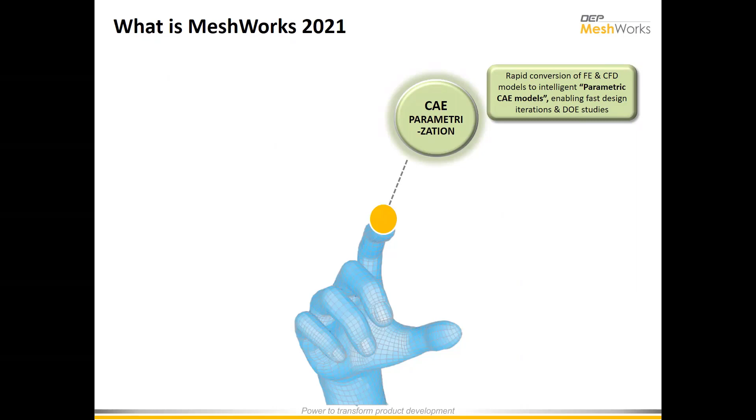Now let's talk about MeshWorks. MeshWorks 2021 is our latest release. It's a CAE parameterization tool which helps you convert FE models or CFD designs into a parametric model so that you can perform quick iterations and design of experiment studies.

Next is our morphing technology. With the help of MeshWorks morphing technologies, you can get upfront design solutions without any CAD. It also reduces the CAD to CAE and CAE to CAD kind of interaction time by directly taking the legacy models and utilizing that for your new design.

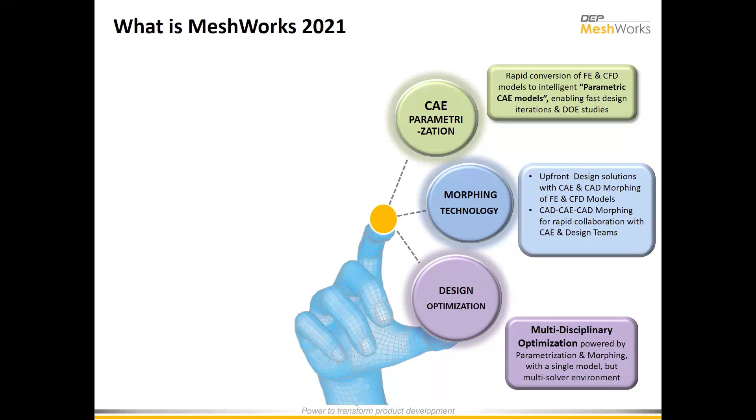Next is design optimization capability. MeshWorks has a powerful DOE facilitation, and it can help you generate MDO studies and perform quick optimizations. It internally has a parameterization and morphing environment, so if you create parameters on one model, the same can be appended into other models. For example, if you are parameterizing an NVH model, the same can be carried forward or transformed into a durability, crash, and CFD model. So you only have to do one-time morphing, and that can be carried forward to other disciplines.

Next is a process automation capability. Most of our customers are utilizing our process automation capability, wherein DEP will customize and give the tools based on the requirements of the customer's place. It is easily saving like 70 to 80% of our customers' time on their day-to-day operations, thanks to our MeshWorks to help us achieve this.

Next is pre and post-processing capabilities. As we all know, MeshWorks has a pre and post-processing capability. It has a robust meshing module and a very good post-processing capability, with a lot of automated tools, which also includes result exploration.

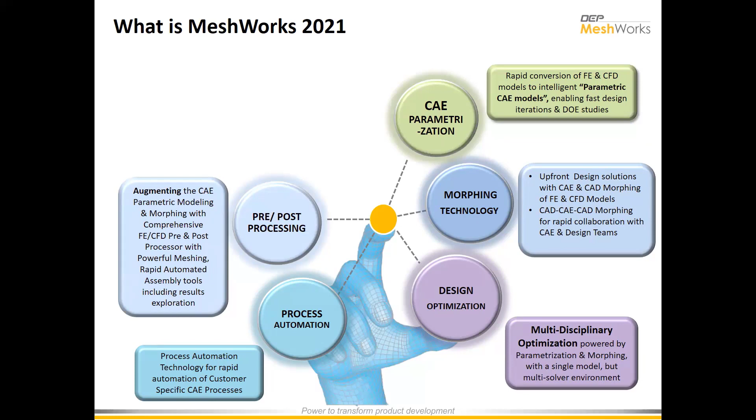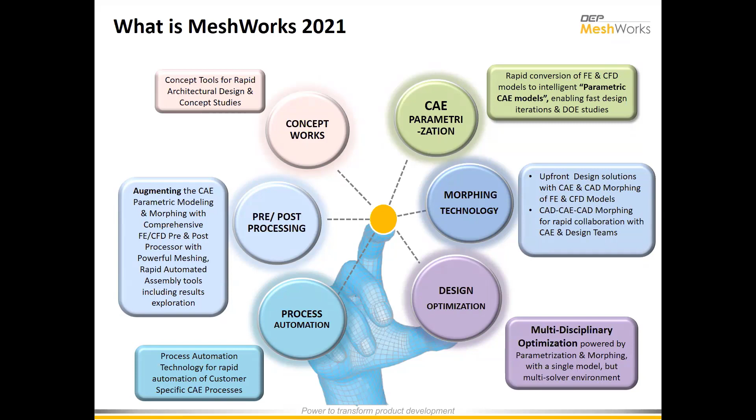Finally, we have released a new capability called ConceptWorks within MeshWorks. This is a tool which helps you design new concepts. For example, if you're looking at new architectural studies or new concept studies, you don't have to start from scratch. You can directly use our software to generate new concepts, and you can quickly reduce the conceptual development time frame in your product development cycle.

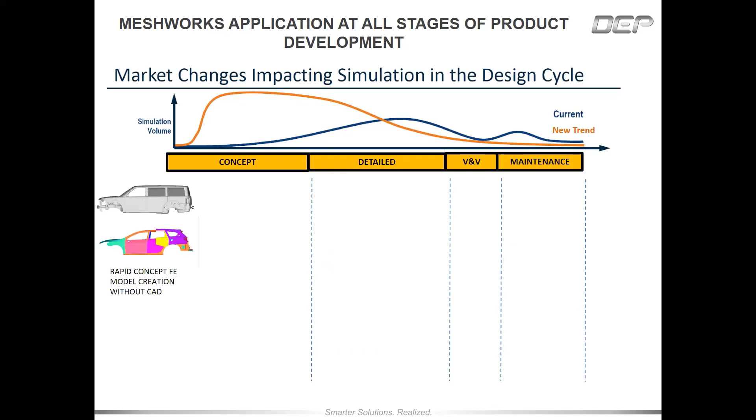Coming into the MeshWorks application at different stages, here is a graph which shows the current trend and the new trend with the application of MeshWorks. MeshWorks morphing and concept modules, when applied in the conceptual stage, let you quickly achieve an initial concept without spending much time starting from scratch. So at the end of the conceptual stage, you will pretty much have 75-80% of a frozen design. And when you go further into the detailed evaluation phase, MeshWorks parametric CAE and topology optimization modules will help you tune up the performance.

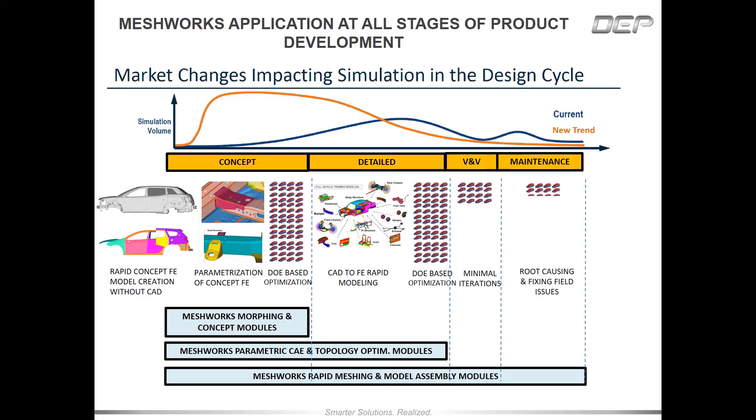Finally, when you go for the virtual validation phase, you will only have minimal iterations that need to be performed. So in the final stage of going to the prototype, the entire process will only consume about 60% of the actual time, compared to the conventional process. Now, coming into the challenges.

Being a tire engineer, what are our regular challenges? For example, if I need to do hex meshing on tire models, with the current tools in the market I have a lot of restrictions, or I need to undergo a lot of training, and I need more experienced guys for building hex models. Is that the real challenge?

Or if you're looking for a simplified process to quickly analyze the tire tread patterns, do you really need a full CAD to start your analysis?

The next question is, if you want to make a design change from one design to another, are you really waiting for a CAD engineer to make the changes and give it back to you? Are you really struggling to make some quick, fine-tuned local design changes on the tread patterns? Is it taking more time?

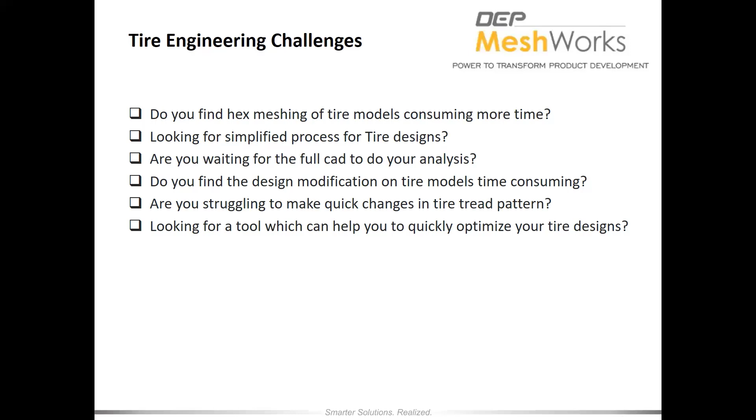Or are you looking for a tool which can help you optimize the pattern and use a lot of DOE kind of studies? For all these challenges, our answer is a solution through MeshWorks.

So in today's session we are going to talk about some of these solutions. First is mesh model creation, with a live demonstration on how you can create a very high quality 2D and 3D mesh model for tire designs. Next is morphing and parameterization on tires - you can see how easy it is to create with the help of MeshWorks. We'll show that live today.

And with all these changes, how you can nicely plan the design for aquaplaning and do any kind of further optimization study would also get covered.

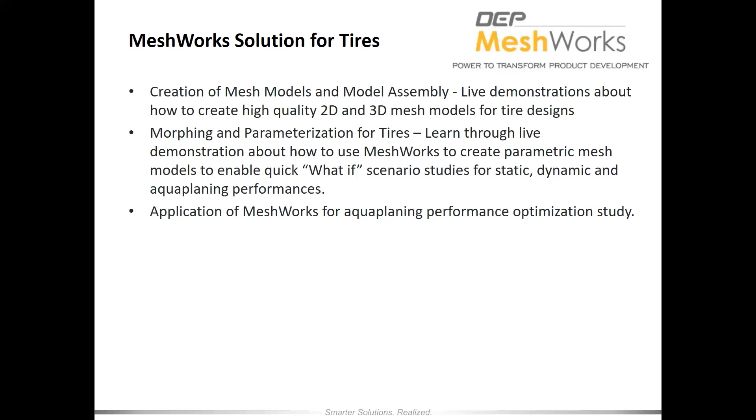Now coming into the tire designs - with the help of MeshWorks, you can create any type of models. You can create the shell mesh, which automatically becomes parametric when you use MeshWorks. You also have sophisticated tools which can automatically generate hex mesh on your complex tread patterns.

If you're looking for discrete tire modeling to perform your NVH assessments, yes, we do have a nice process in MeshWorks.

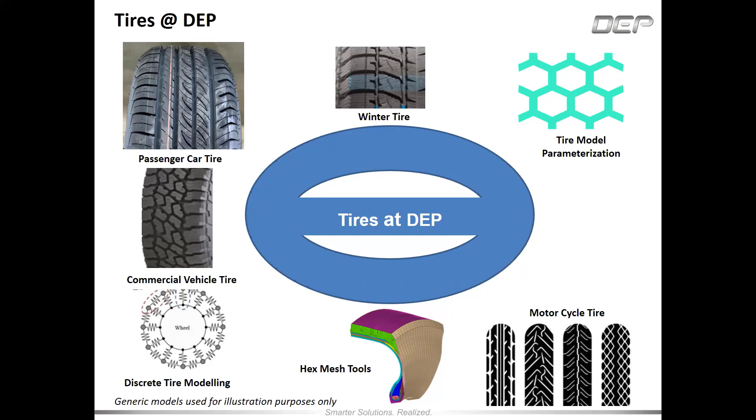Saying all these things, when you come into the MeshWorks application, if you are planning to study air inflation pressure, response to certain vertical loads, or fitment analysis with a rim, those models can be easily generated with the help of MeshWorks on a planar level.

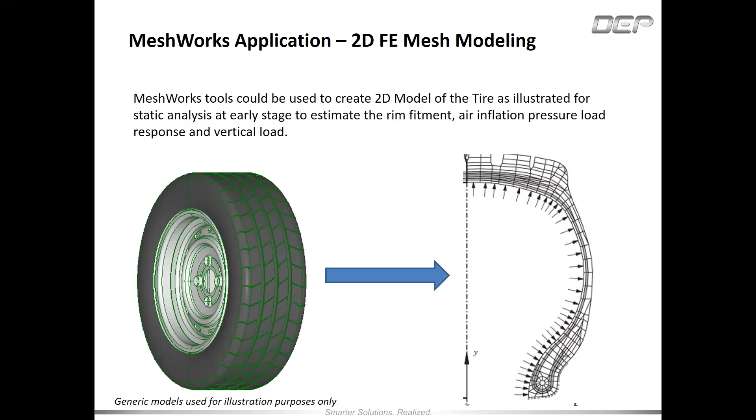Next is our tire modeling process. When you have a CAD section to start with, MeshWorks is a nice process - we only need to pick the CAD face. Then the software will automatically generate the cross section, with an internal process identifying all the cutouts that need to be imprinted. It will have them all captured in a plane in the CAD, and generate a nice cross-sectional mesh.

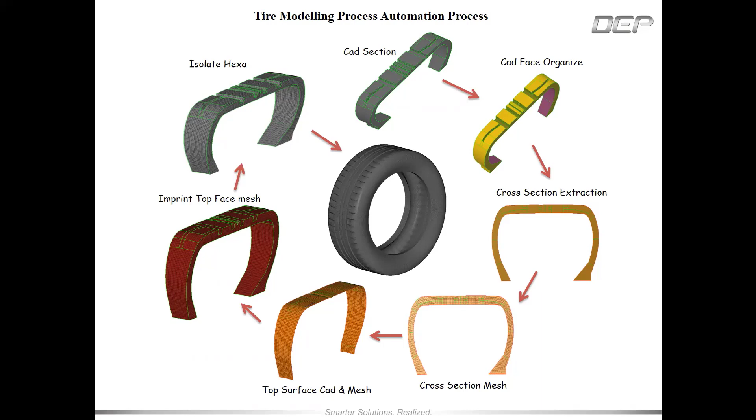And then you just need to do a top surface mesh and do an imprinting. Finally, you will get a nice hex mesh model exactly matching the original design.

And here is one example - if you have a tire pattern available, you can nicely generate that into a hex mesh using our automated hex modeling tool, which Paresh will take you through in today's session.

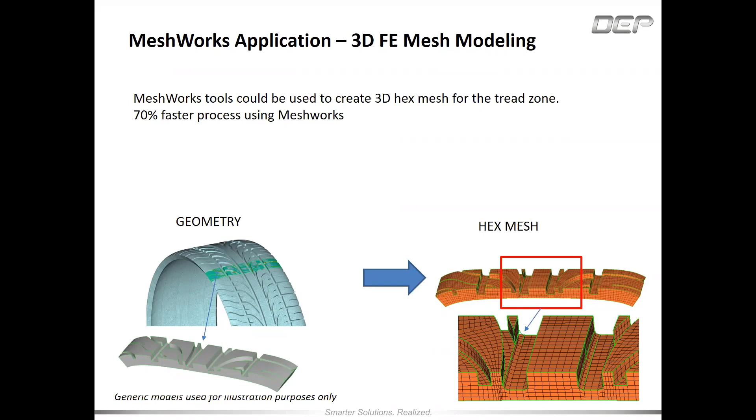On top of this, for applications like NVH, where NVH tire modeling is going to be very challenging, we do have a nice solution through MeshWorks. If you have any interest in that, please do ping us - we can take you through those processes, which internally have some tune-up parameters for optimization.

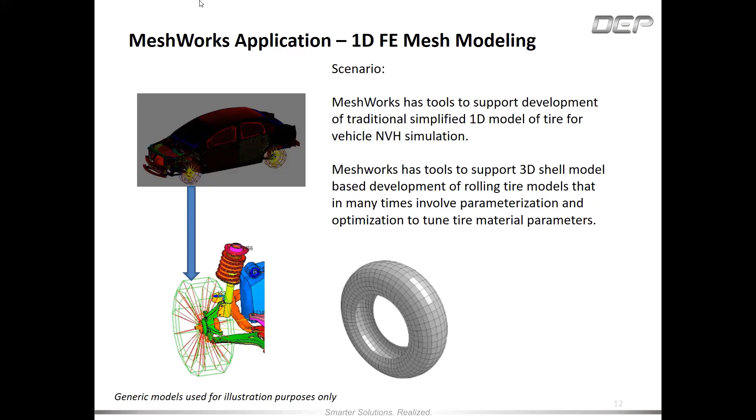Thank you. Sure, Raj, can you hear me okay? Yes Paresh, yeah, okay. Once again, thank you so much, Raj. So let's go ahead with the demo.

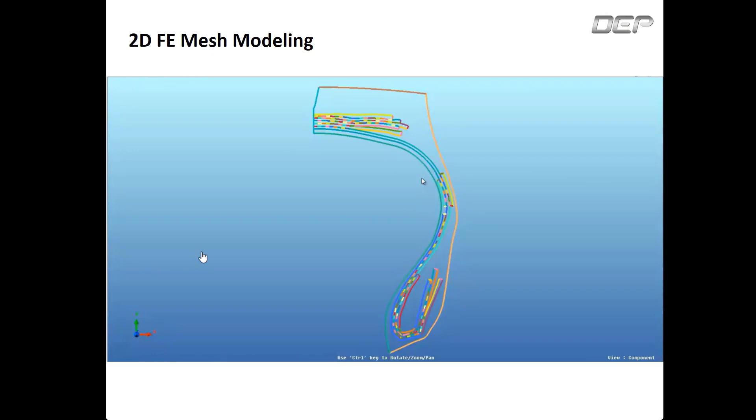So the first demo would be on 2D FE mesh modeling. Here in front of us, we have a 2D model of a tire for stiffness analysis. We have this CAD data which we received from the CAD engineer. The inner portion you see here on the screen is for the pressure load area, and the outer is for the carcass.

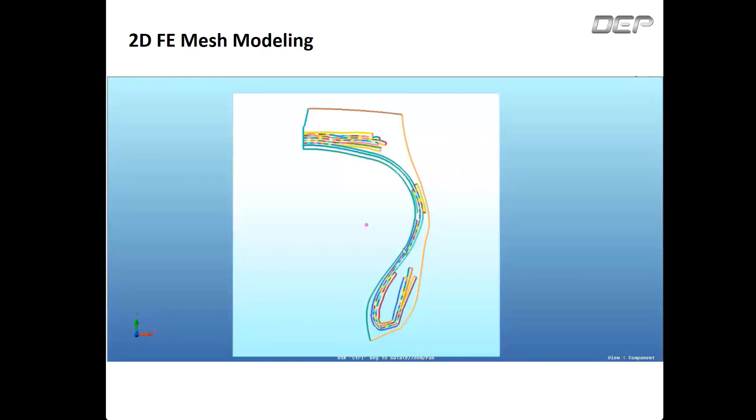Now, the first thing we need to do before starting the 2D modeling is create a nice CAD surface onto these particular CAD curves. In MeshWorks, it's pretty easy - a user has to define the plane, define the size of it, and simply click on create. Automatically, a plane will be created, and a CAD curve or CAD surface will be created.

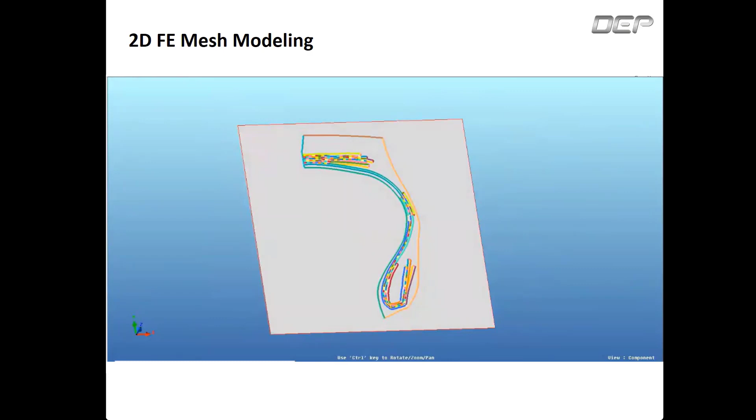Now, the second step is we will be imprinting the CAD curves onto the CAD surface. To do that, it's pretty easy - again in MeshWorks, by just selecting the surface and the lines, and simply clicking on trim. So this is our first step, where all the CAD features have been imprinted onto the CAD surface. By deleting the extra surface, we just have the CAD surface which we want to mesh.

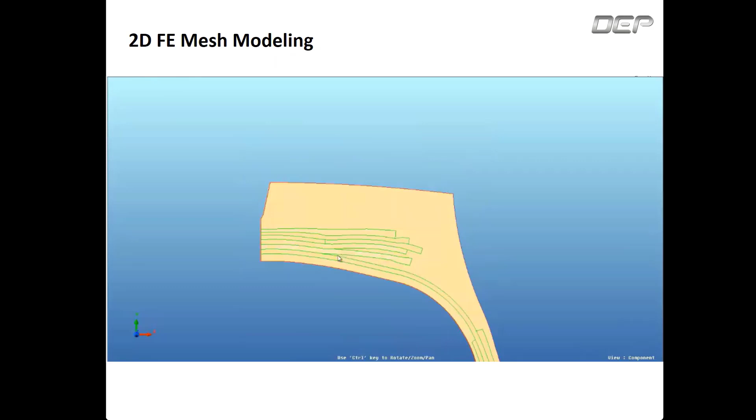Before going for a mesh, as we can see, all the CAD surfaces are organized into a single collector. But in reality, all the different lines we see in between are nothing but the reinforcements, and these reinforcements have different materials and different properties. So before meshing, we will organize all the reinforcement CAD sections into different collectors, so it would be easy afterwards to define the material and property for each of these different sections.

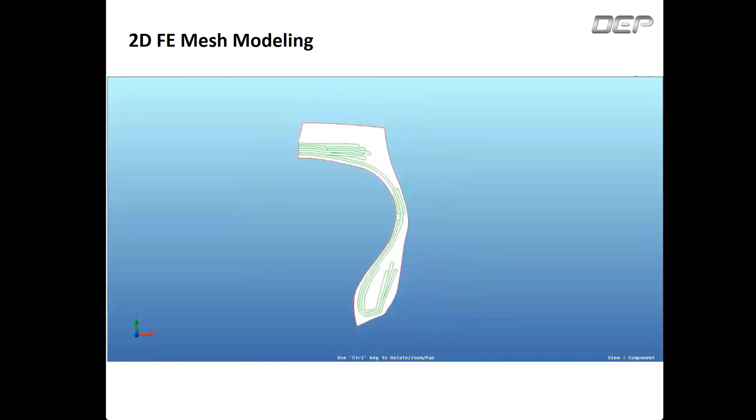Now, once the organization has been done, we can directly go into meshing. With the meshing type as mixed, target element size as 2.5, a user can simply go ahead and select the CAD surface and say preview. Here, this is our mesh output. By using these seeding points, we can go ahead and change the seeding points of this mesh so as to get a good and nice mesh output.

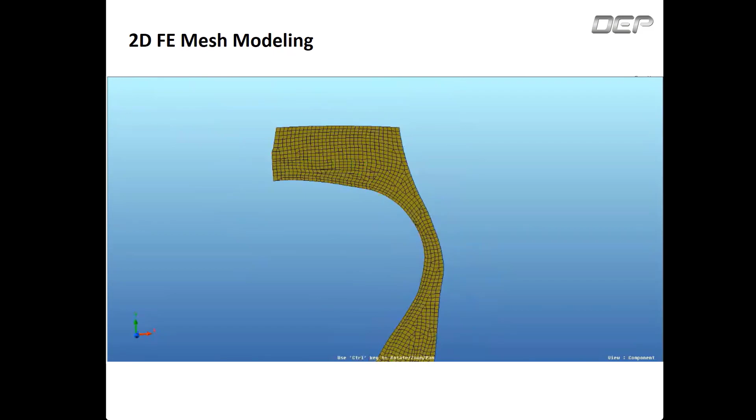You can also go ahead and do a quality correction on this particular mesh to get a good mesh flow. But we have a unique option called move tria in mesh editing, where automatically MeshWorks, when a user clicks on the tria element, will define a white path, and a user can nicely click anywhere on this particular white path where the tria can move. With this tool, I will select the tria and simply click on the edge, so automatically all the trias are removed, and we get a very nice and smooth mesh flow.

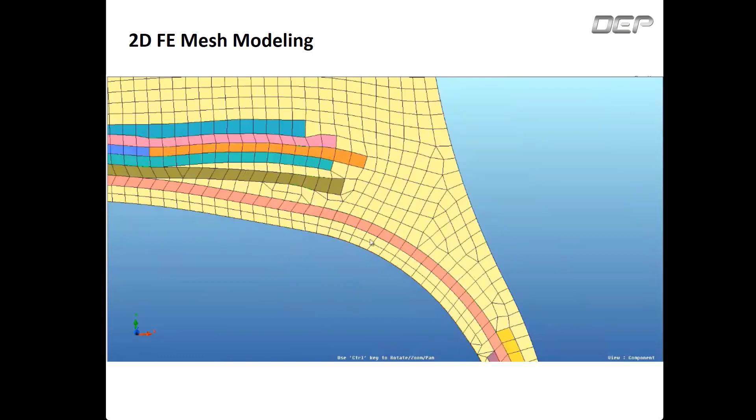Similarly, if we have opposite trias, what we have to do is just align the opposite trias to each other and simply click one tria onto the other. So we can remove the opposite trias quickly. Likewise, we can go ahead and get a very nice and smooth mesh flow within less time, which will help us in reducing the model building time.

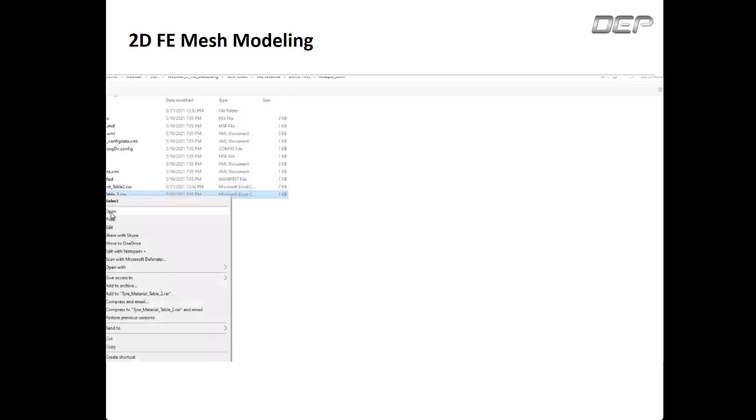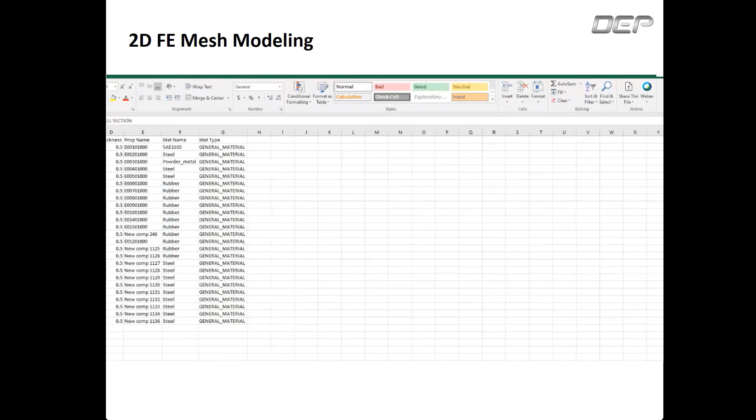We can even see the material has been written in front of each and every component's name, along with the material type. Now we will open the material table, where we can see all these materials are defined with E, density, nu, etc. So this is just a small prerequisite which we need - we just have to fill this data.

And once we have these two CSV files available, we can go ahead and do an automation for assigning material and properties. We can see there are no material and property, and these are the same component names which we saw in the Excel sheet. Now we will just be selecting the component CSV file, material CSV file, and click on create and assign.

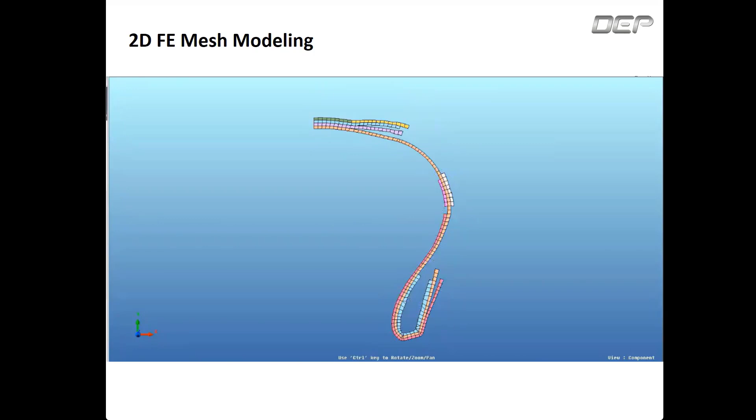Automatically, within a few clicks, in a few seconds, the material has been assigned, and we can see the same names that were in the Excel sheet. Now if I go ahead and click on steel and say show me the steel property, the steel material, then these are nothing but the steel material. Similarly, we have some properties.

Now in your Excel sheet, there might be n number of properties which might be created. So it will take all the data and keep it as unused or empty. You can just go ahead and remove the unused and empty, and then this is what has been assigned to the respective material and component.

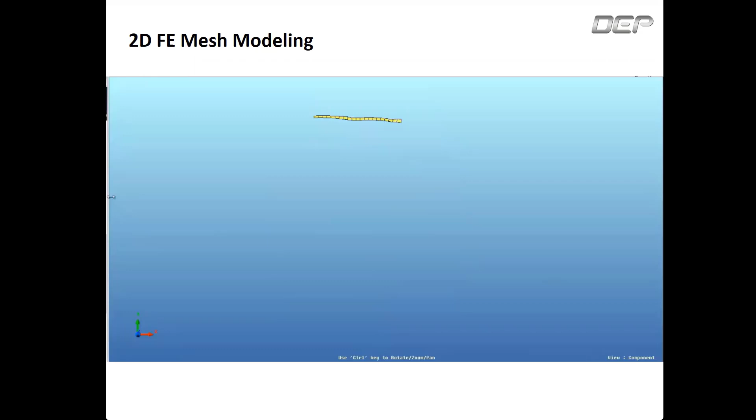That is what we can see on the screen now. So, likewise, this is how quickly we can do 2D mesh modeling in MeshWorks. And once the meshing has been done, we can nicely go ahead and assign material and property.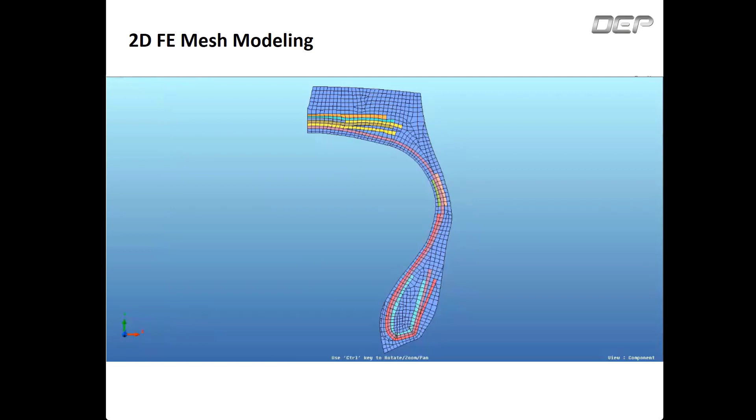Now we can go ahead and create a runnable model in MeshWorks, and we can also go one step further by creating a parametric file, which means that if you have to do any modifications in your 2D FE mesh, you can create some morphing parameters onto your component.

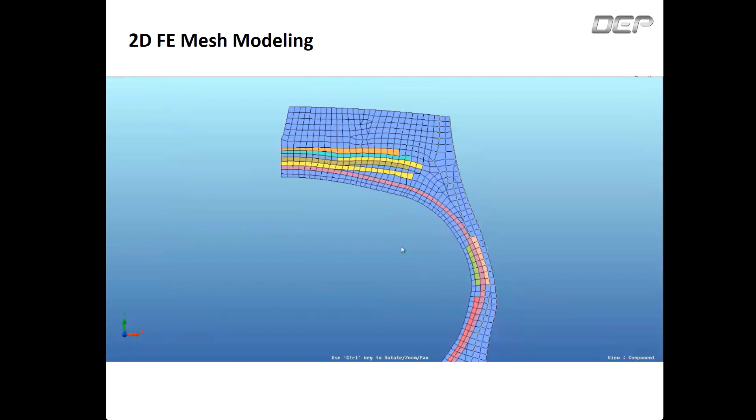Now you can see here, if you want to adjust the pressure load, you just go ahead and select the interface and simply morph your mesh, morph your 2D mesh. If you have to increase or decrease the material of the tire, go ahead and increase the outer width. That's what we are looking at in front of us.

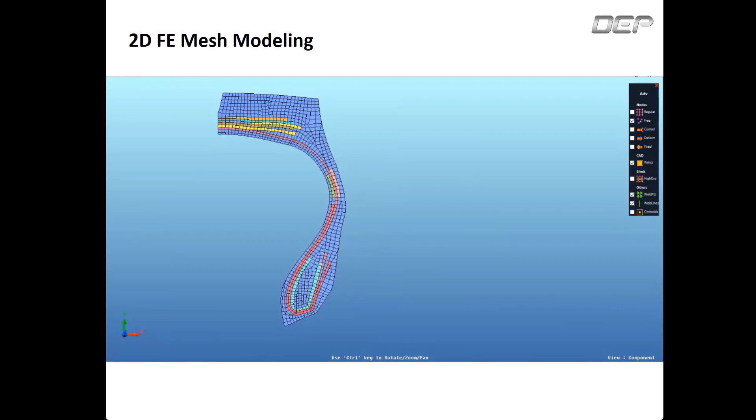Now, rest of the parameters are for the reinforcements. What if you have to increase or decrease the material for the reinforcement? Yes, you can do that too by just going ahead and creating some parameters. We just have to make sure that whenever we create these parameters, the profile of the tire is not changing. So that's what we have taken care of. Only the inner elements are moving, but the outer profile is exactly the same.

Similarly here, we can go ahead and see different outputs. We can increase the material of the rubber or steel, and likewise we can go ahead and do our optimization study. So this was all about the parameterization of a 2D mesh modeling.

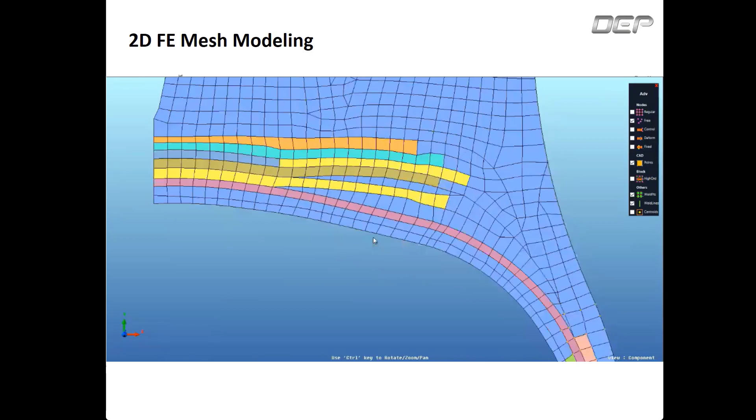Now let's go ahead for a 3D mesh. So what if we have to do a hexa mesh? Here in front of us, we have a cut section of a 3D model, which we got from the CAD engineer, and we just have taken a cut section of it. Now, below we have the tire automation. We have created a special automation for this particular tire tread. So first, let's see how our model looks like.

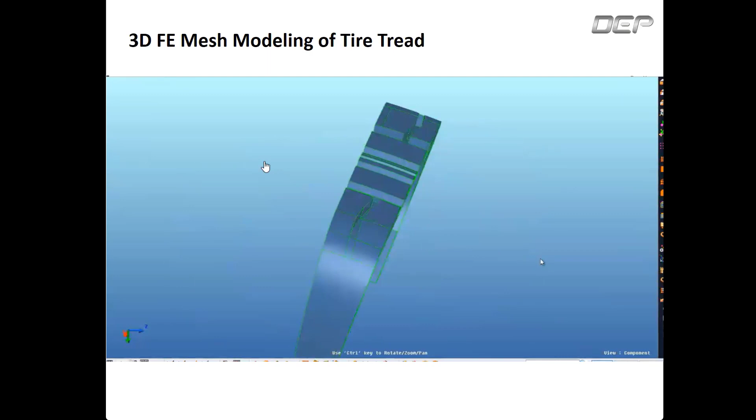So we have many grooves, as we can see here, and there are a lot of features too in our model. So the first step we will be doing here is organizing our CAD into different collectors. This will help our next steps to perform well.

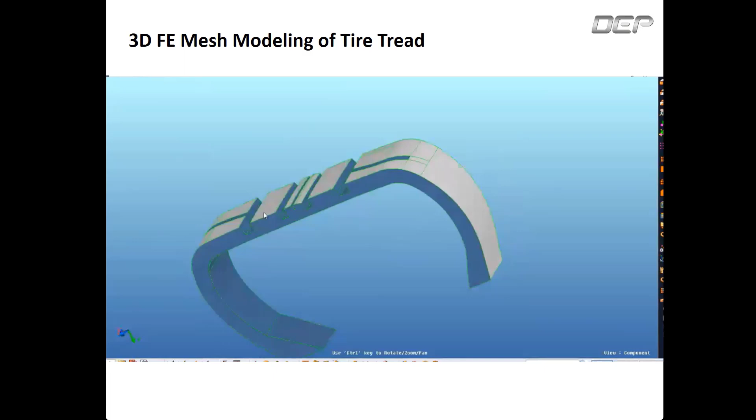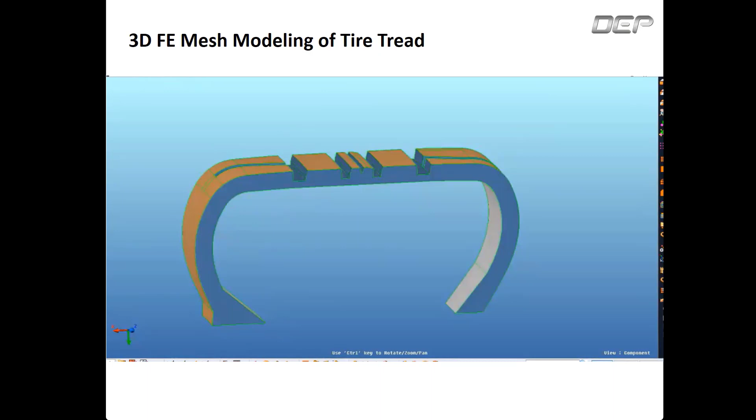So basically, to create a hexa mesh for this particular tire tread, we will be following two steps. One, we will be imprinting all the features, or capturing all the feature lines in one direction, that is on the side panel. We will mesh the side panel and create a mesh where the features have been nicely captured. Then the second step is we will capture all the features of the top surface, mesh the top surface, and imprint the top surface onto the mesh. So that will complete our entire process.

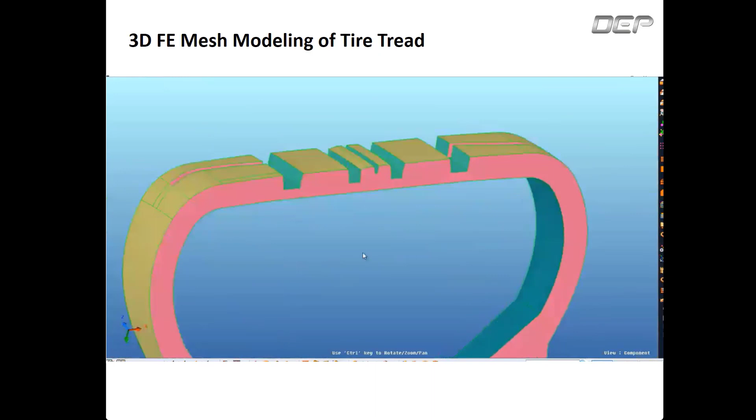So let's go ahead and see our first step. Now, once the organization has been done, we will go ahead to imprint or capture all the feature lines in the side panel or side surface.

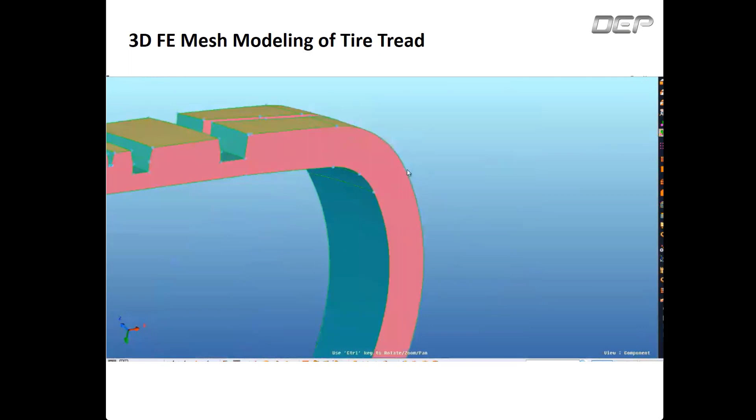So a user has to define the axis, define the center point, then select the width of the tire tread, then the extreme endpoints. These are a few prerequisites which we need to select before imprinting all the features. Then automatically all the features will be imprinted, along with the surface to imprint. Automatically MeshWorks will create a new CAD surface with all the imprinted features.

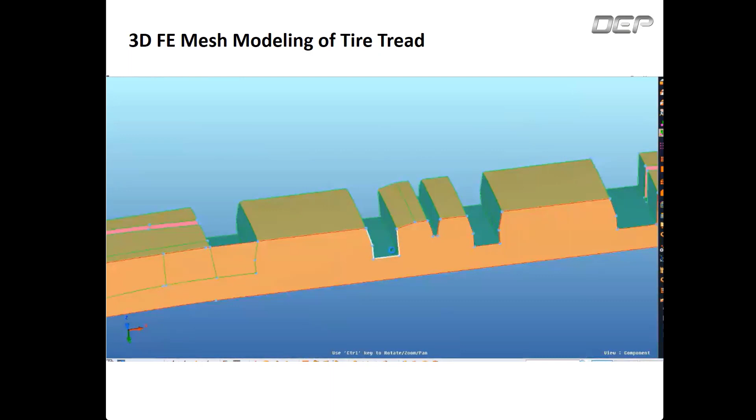So the first step is to create the CAD surface. Now we can also see there are some grooves which we need to fill out. So we have created a second tool called fill grooves, where the user just has to select the CAD curves of the particular groove. That's all. So by just selecting the CAD curves, we can go ahead and fill the grooves automatically. We will be doing it for the entire model, wherever we see the grooves, we will just fill them out.

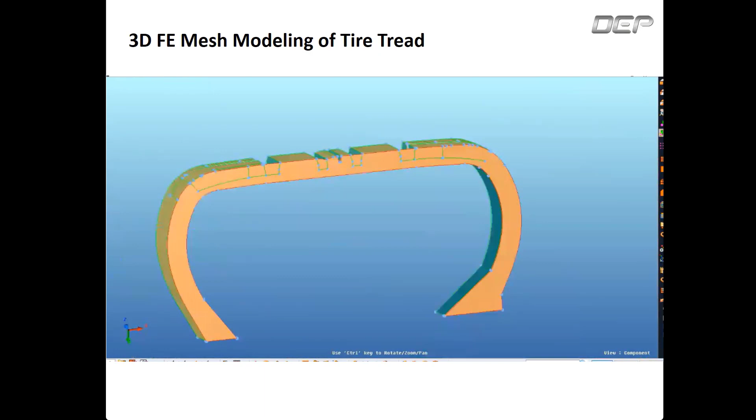Now, once the features have been imprinted, we will go for meshing. As we are doing hexa meshing for this particular component, we need a quad dominant mesh type. Then the target element size would be 2, minimum is 1, maximum is 4. As per the customer or user, he can change the element size and then proceed ahead.

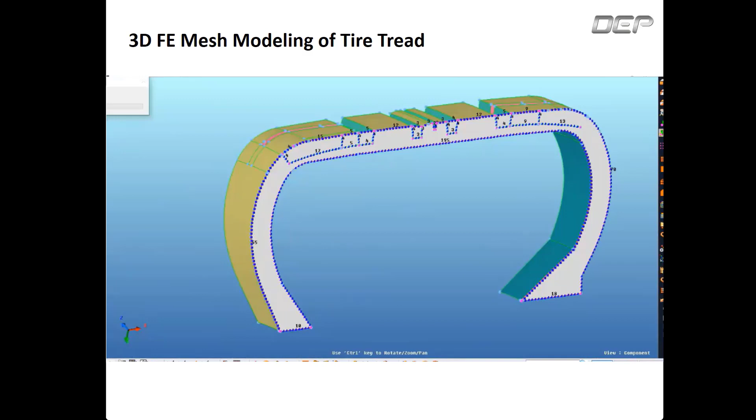Now, once I click on preview, MeshWorks will show the mesh. This is nothing but a preview first. We will be taking help of these seed points to get a nice quad dominant hexa mesh.

Now, as we can see, there are some seeding points on the right side and left side which are not matching. So what we will do is use the discretized CAD surface. By just clicking on 2 points onto the CAD surface, it will nicely go ahead and trim the CAD surface. This will help us create a good mesh flow for this particular side face.

Similarly, we'll go ahead and select different sections, and trim the CAD surface. Once the CAD surface has been trimmed, we will go ahead and, with respect to the seeding technique, create a nice quad dominant mesh. So this is the first section. Likewise, we will go for the second section too, and then the entire model.

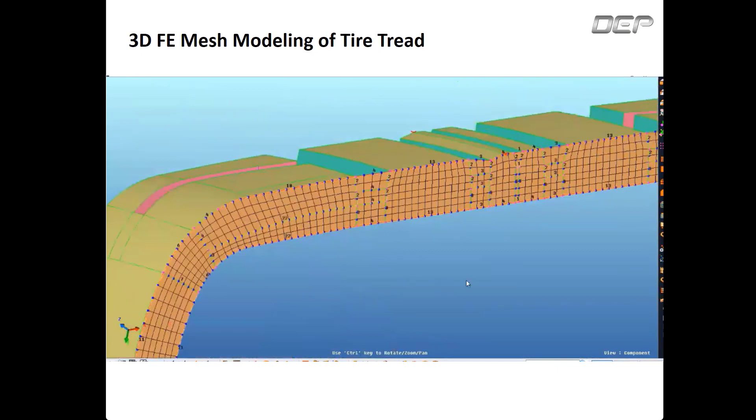So this is the final output, which you can see, which has covered the grooves too. Now the side mesh has been completed.

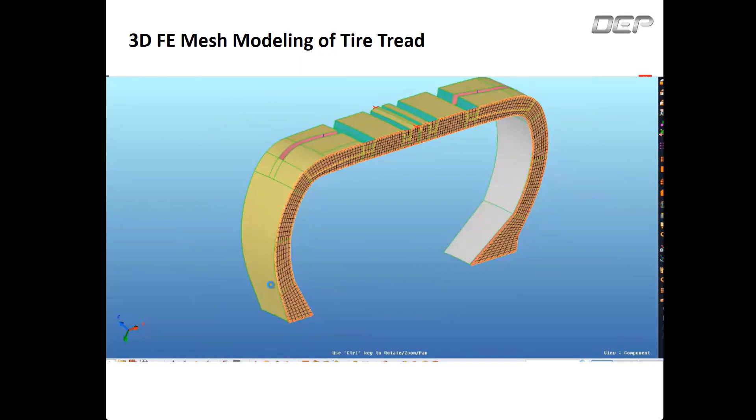Now the next step is just to go ahead and create a hexa mesh in the side view. So for that, we just have to define the tire geometry. Automatically, when the hexa mesh has been generated, it will nicely adjust the hexa mesh with respect to the tire geometry. Select the geometry, top surface, bottom surface, and it will create a top surface mesh, and also create a hexa mesh in the background.

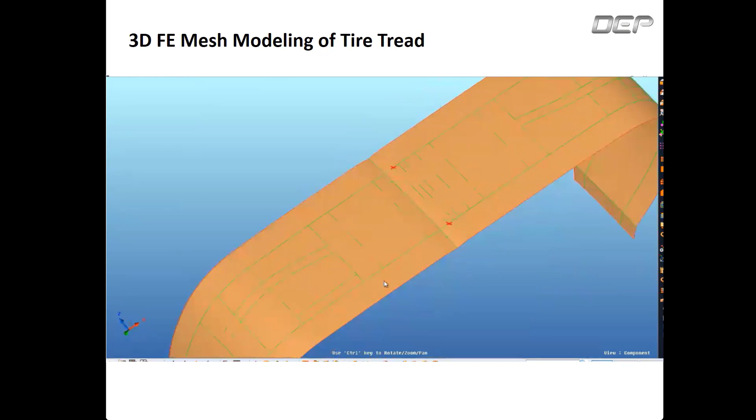So there are 2 steps going on here, as we can see. By selecting the top surface and bottom surface, it has created an additional CAD surface which has all the feature lines. I will delete the feature lines and CAD surface which are not necessary. And then it also created a hexa mesh.

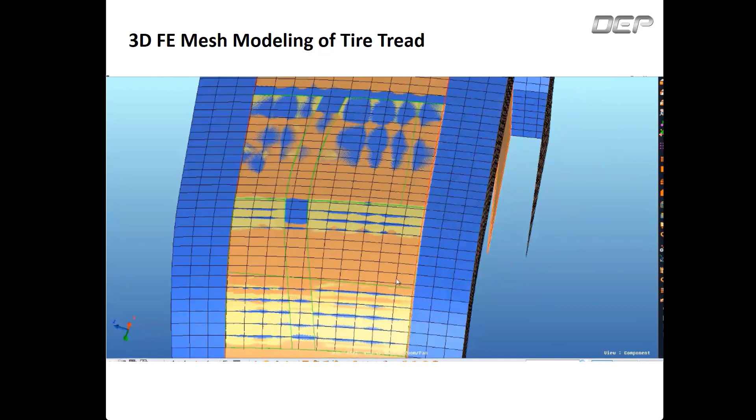Now, if we see here, the hexa mesh has not been aligned with the particular CAD surface which we just created. So this is our second step, where we will create the same mesh onto the top surface and then imprint the top surface onto the hexa mesh which is below, as we can see here.

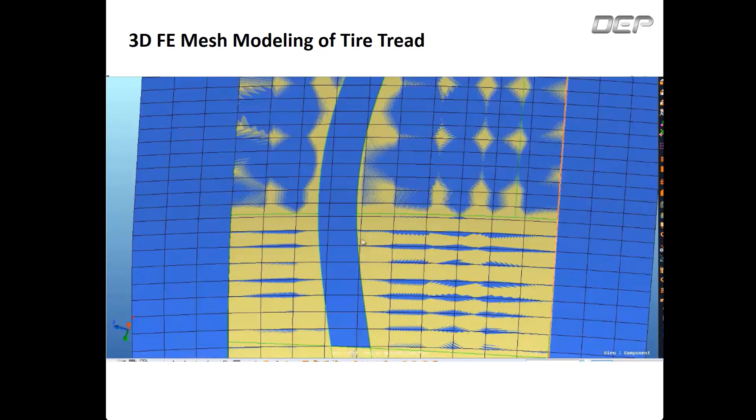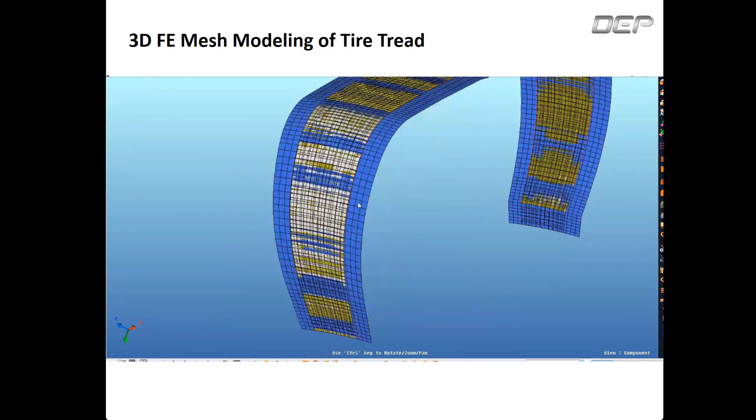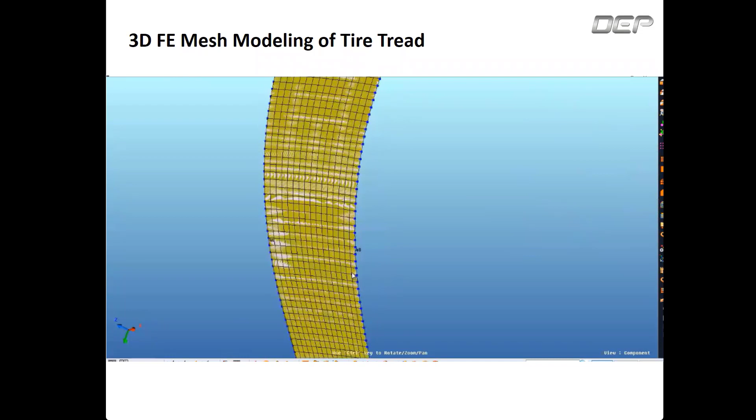So we will follow the same process. Select the top surface, then click on preview. With respect to discretize and show seed points, we will get a nice mesh. Now we'll just adjust the seeding points and then click on map mesh. Then we'll get a good quad dominant hexa mesh.

And this is the final output, where the entire mesh is quad dominant and all the features have been nicely captured.

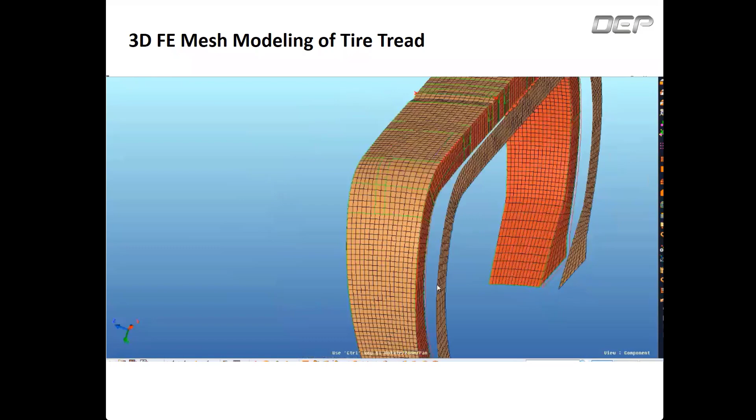Now the last step is to imprint that particular top surface feature line quad dominant mesh onto the hexa mesh. So just by one click, our final output is almost ready. This is the final output, where from the side view we have nicely captured all the features, and from the top view we have also captured all the features.

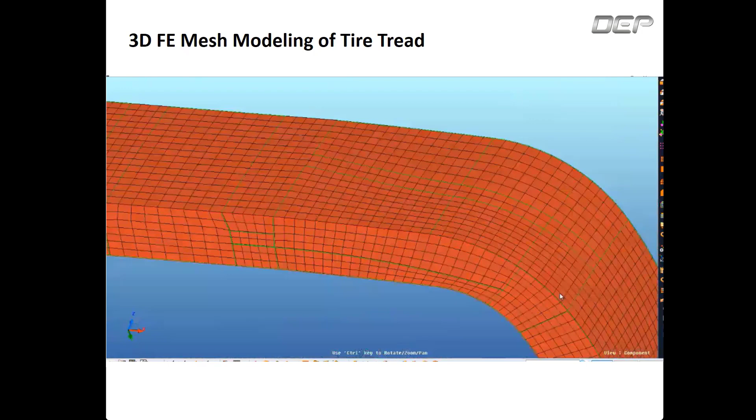Now here we also saw that there are some grooves in this particular component which are unnecessary, so you don't have to go ahead and do it manually. We have an option called isolate hexas. Automatically it will detect the grooves and organize them into a different collector.

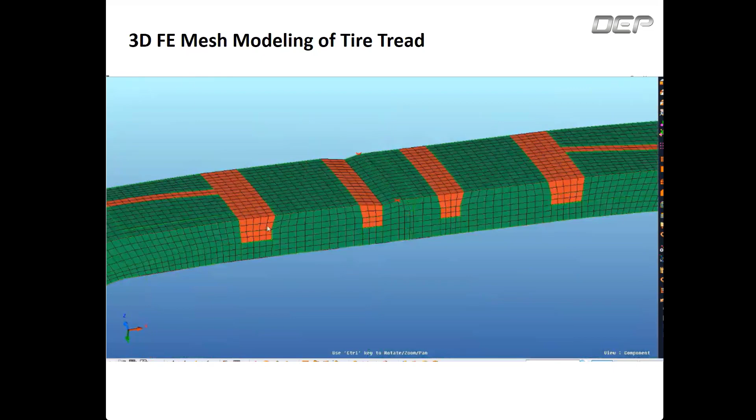So this is nothing but our final output for the 3D modeling of a tire tread.

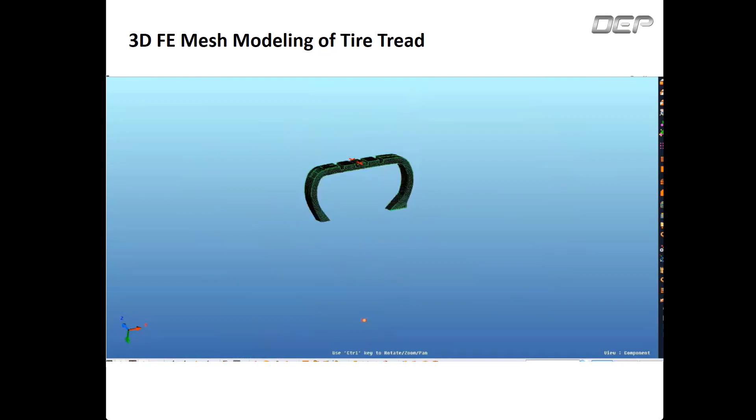Now once we get a cut section of it, we can go ahead and revolve it by 360. To do the revolve, we have two types: one is variable pitch and the second is single pitch. The example in front of us is a single pitch. We also support variable pitch, which needs some additional CSV files and additional data. For this process automation, the user has to select the component, center node, and the axis. Automatically, MeshWorks identifies the angle, and then it will create a revolved 360 nice hexa mesh for us.

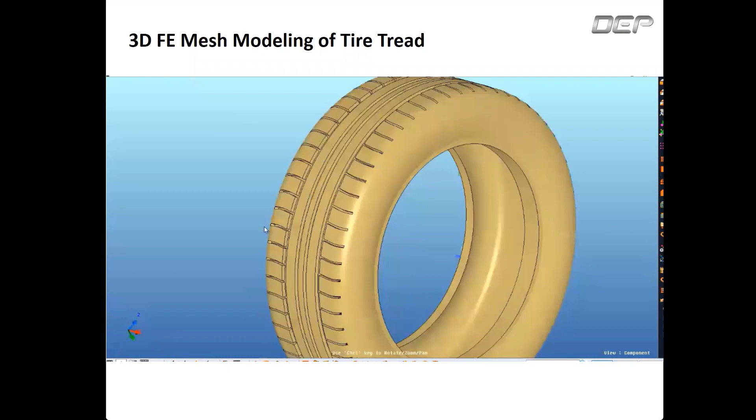So this was the entire process of modeling. Now, what if you have to go one step further and create some parametric file for that particular cut section? We can go ahead and see that too. So let's say, beforehand, we have created some parameters.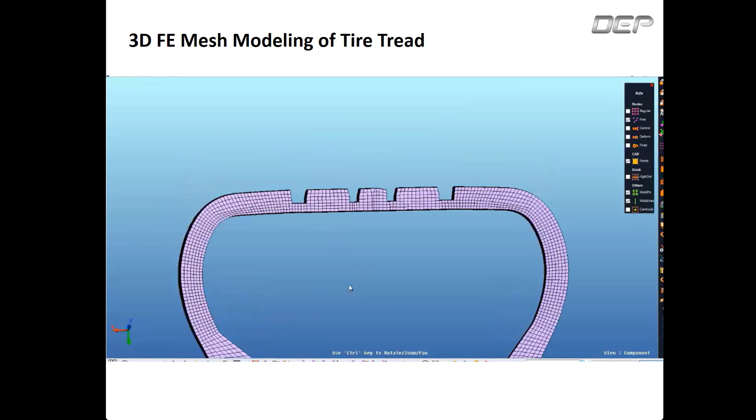The first one is a tire thickness change. Let's say you have to change the thickness of your tire. What you can do is create some morphing with the help of the morphing technique in MeshWorks, and create these parameters. All these changes are now happening on the hexa mesh. So this is for the tire thickness change.

Similarly, we will go for a tire profile change. What if you have to change the profile of the tire? At the end, it will very nicely go ahead and create the entire 360 revolved hexa mesh, so you can go from one tire size to a different tire size just for an optimization study.

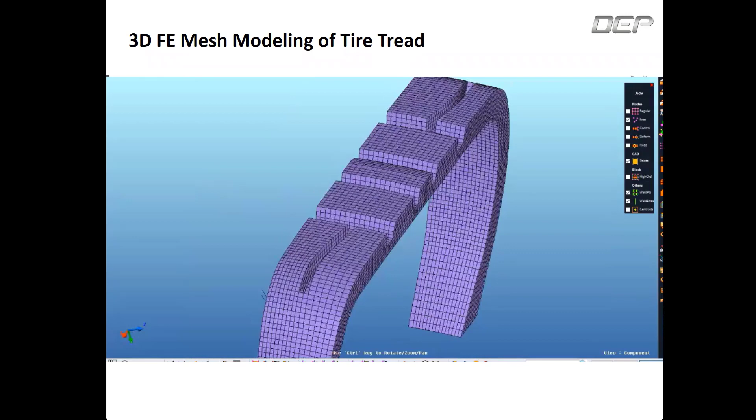Then we have the tire width change. What if you have to change the width of the tire? You can do that too. You can play around with the grooves. If you have to change the thickness of the groove, you can create some parameters for that.

I'll just zoom in to this location to show exactly how we can modify or morph the grooves. Here we see only the thickness has been changing. The next parameter would be for the groove height. This is our last parameter.

So here we are not changing the profile, we are not changing the thickness or the width of the tire. We are just increasing or reducing the material of the groove for your optimization study.

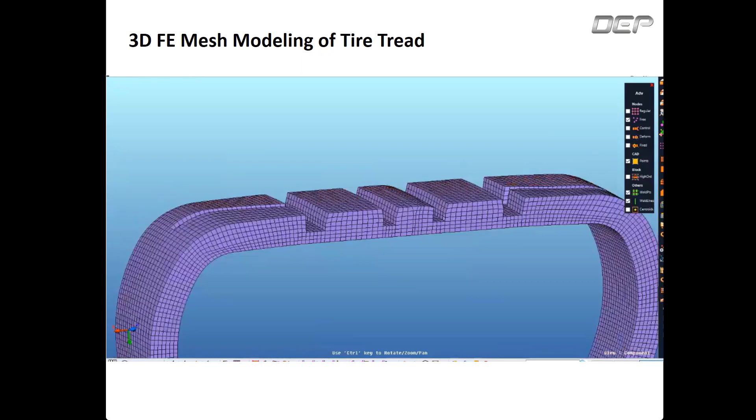So this was all about the 3D FE modeling for the tire tread. As we can see, by using this small process automation, we can go ahead and very quickly create a hexamesh, and also create some parameters.

We were also able to demonstrate how nicely MeshWorks can create a parametric model that will help optimize the tire tread pattern. We can do any optimization, any what-if scenarios such as groove depth, block width, sidewall stiffness, and then we can go ahead and create a multidisciplinary optimization to create an optimized design, and it will also reduce significant cost.